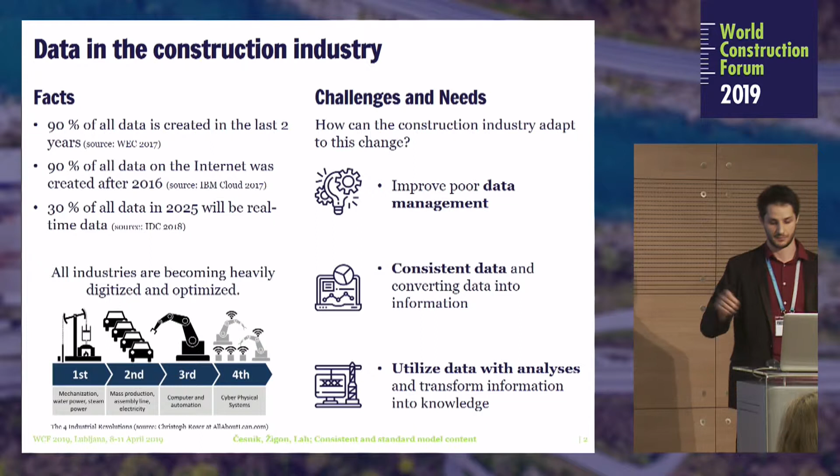So the entire presentation is going to be basically how to use data, how to use consistent data inside of BIM models. One of the solutions is to use BIM, because we know it's building information modeling, which is a process, and a lot of the previous speakers said that we can use BIM in a variety of areas. I agree with that, but we do need some requirements before we start using it.

We need to know how to use the software that we have actually on the market. We have to know how to manage that data. We have to know how to form new workflows around this new process and how the information flows through this process. Then we actually have to know exactly what's in our models. If we don't know that, we don't know anything.

That it's just building modeling, it's not building information modeling. We have to figure out what data has to go inside of the models, that it's meaningful, that it's intelligent. And then we have to figure out how we're going to process all that data, all that information inside of our models and transform it into knowledge. So that's the main workflow, to get from real life into actually knowledge through these BIM models and BIM processes.

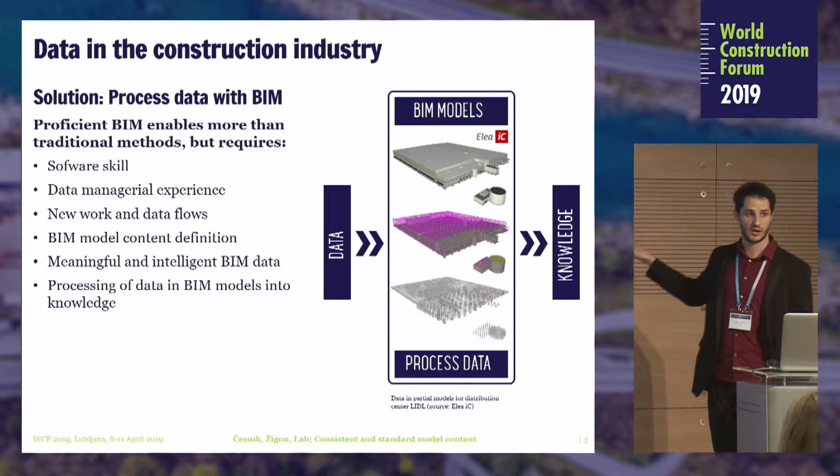So there are a couple of requirements. First of all, we haven't talked about this much in this conference, but we have to realize that employers, meaning investors and owners, play a huge role in how we can actually use BIM. They have to define their vision. They have to have the knowledge of BIM. They have to educate themselves if they want to actually have useful results from their projects that use BIM.

So they have to define their BIM requirements from their goals. They have to define how BIM is going to be used, and what the final results are. And they have to actually create a document called an EIR, meaning Employer Information Requirement, that defines exactly the use cases, the requirements, and what the employer wants to do with BIM.

The companies then need to, in reply, make their own document. This is the BIM execution plan that I'm going to talk about later. They have to accept and use BIM, improve workflows, proficiently implement BIM, which is a really hard task for all these use cases, and improve on different fields.

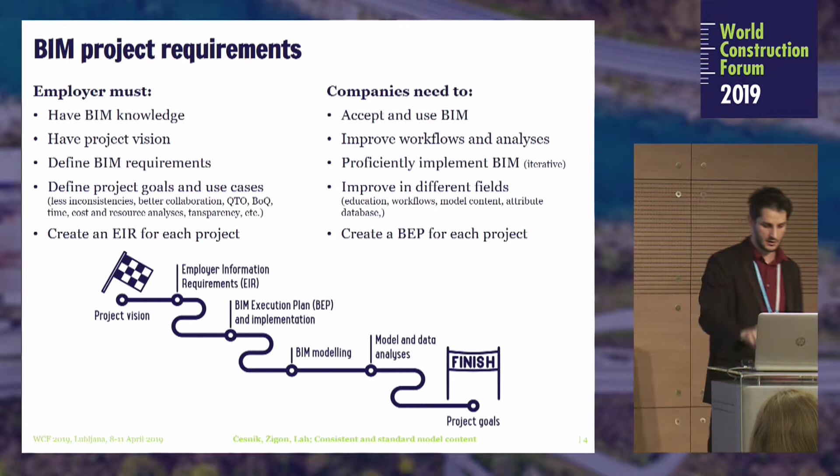So what actually consists of a standard BIM execution plan? Basically, you have to define all of the models that have to go into the workflow, who's going to do them, what's going to be included into them, and they have to define all the workflows that the project is going to follow.

This is really difficult - they have to classify everything in the models. If you don't have a classification, we can't use those models, we don't know what's in them. Then we have to define how developed those models are, what information goes into them, because if we don't have information, we just have 3D models. And then we have to define exactly for the element types or objects the required properties - the names, the values - and it has to be consistent over all the models.

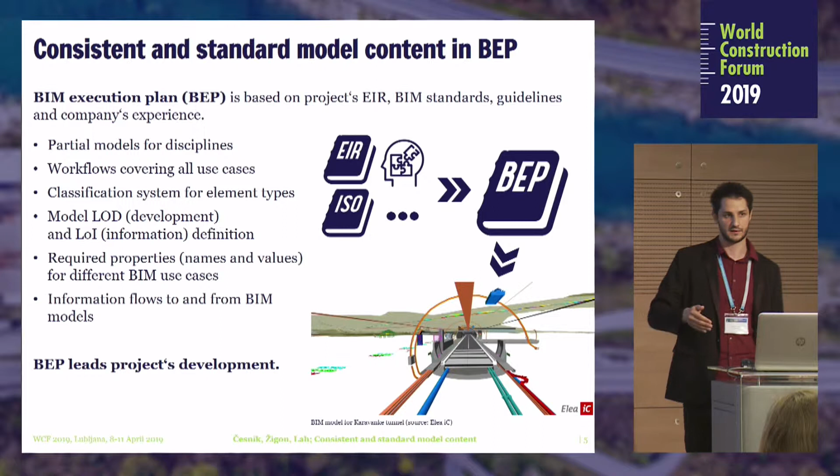And then we have to figure out how this information is going to flow, and that's all defined in the BIM execution plan or a similar document that leads the project.

So how we approached it is actually on one side simple, on the other complex. I'm going to simplify it here. The employer defines their requirements, and they have certain properties that they want to include, some information they want to include in the models. From there on, we develop our own information required for our workflows so that we can actually produce the results that they want, and we combine those two.

We basically feed all of the data, the entire framework, into the SQL database. From there, since we have a framework in the database, we can feed it into the authoring environment - that means either Revit, Civil 3D, Archicad, name it. You can basically just program the interface. And then we also feed it into analysis tools, and we connect those two - the authoring environment, so the BIM models, and the analysis tools that produce results.

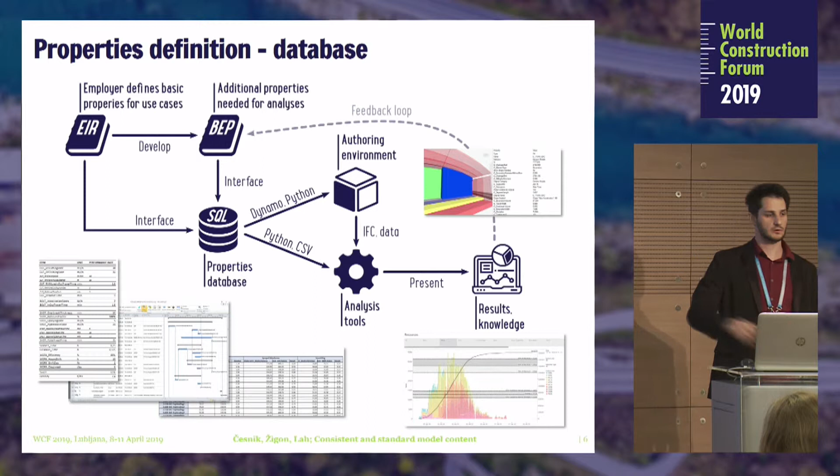And the results are basically knowledge. So the entire workflow flows from the information definition through the framework definition and then into the actual tools that produce results. Since it's an iterative process, every single project is fed back into our knowledge, so that the next project we create is going to include all the knowledge from the previous projects.

Okay, why am I talking about this? It's simple, right? Like concrete is concrete. Well, not quite. On one of our projects, this is the Karavanke Tunnel that we did a couple of years ago, and it's still ongoing, as Slovenes know. We had a couple of companies that created different models.

And we said, okay, let's have a quality of concrete included in all the concrete elements. And we figured, okay, everybody knows how to define the properties. Unfortunately, that's not true - everybody in their own companies has their own idea how they want to define the values. So is it slash? Is it backslash? Is it a dash? And that becomes a problem.

If you don't have consistent data, you can't really feed all this data into workflows, into rules, because the rules break - they don't figure out what's going on.

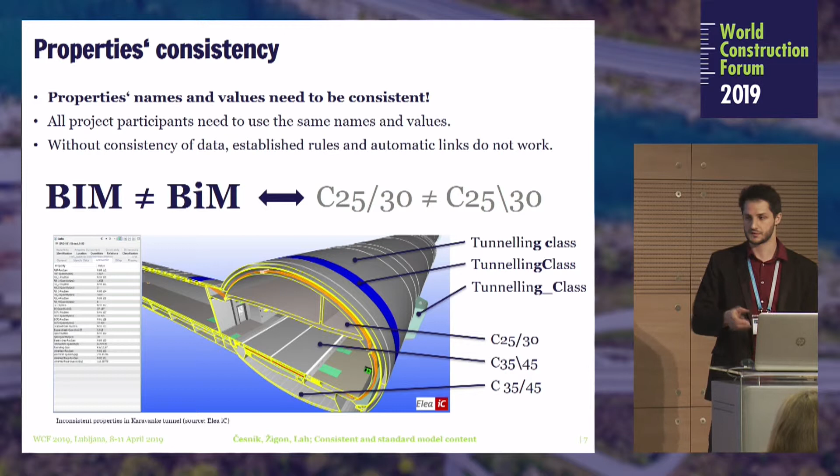So if I say that we have different data, if we make it consistent, then we can feed the design data, the monitoring data, and the construction data into our models, into our tools, and after some work done on that data, on that information, we have knowledge. And knowledge means we have histograms, time schedules, construction animations, visualizations.

And at the very end, we have quality control. This is one important thing for BIM that the previous methodology, the 2D methodology, does not cover - we have quality control over what we're doing, we know exactly how the information is going and what the results are.

And you're probably asking yourselves, okay, that sounds very nice and clean, but can you back it up?

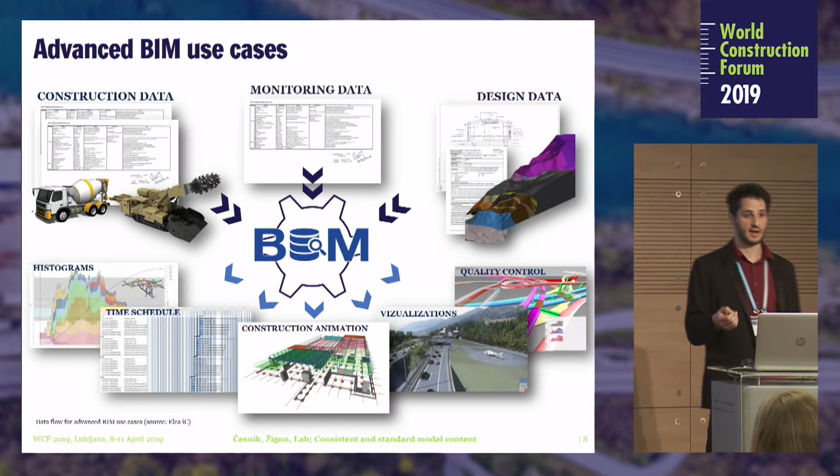Actually, we had a project last year. It was a tunnel interchange in Sydney, a very, very intense project with 2 construction sites. It included 12 road tunnels, 6 access tunnels, 6 ventilation tunnels, and a combined length of more than 19 kilometers. We called it a spaghetti. The problem was the submission time was really short, it was 3 months, and we had to optimize the design.

We got the design from other designers and had to figure out which one is the best. We had to figure out how to optimize the construction and excavation of those tunnels. And at the very end, we had to optimize the overall pricing and cost, because it had to be submitted as the actual cost, not just an approximation. This was our goal.

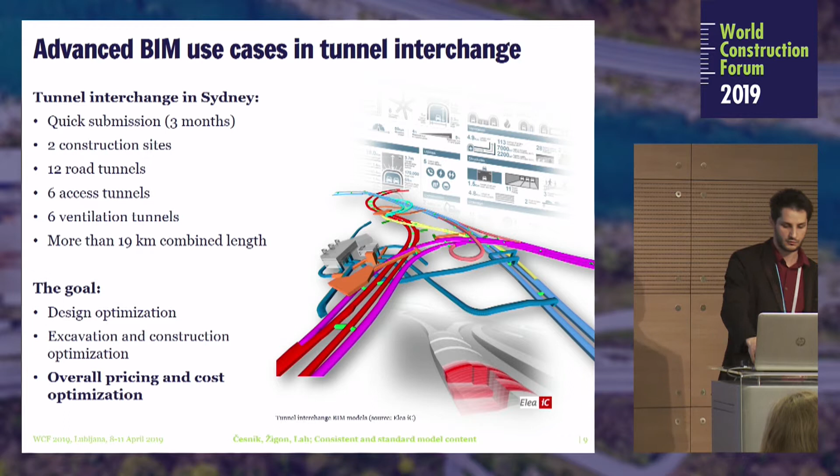What we did was quite complex. First we figured out how the Sydney people are doing those things, how they are modeling and constructing their tunnels, how things are done in Australia. We studied it and figured out some rules, wrote them down, and then created some parametric models, parametric families in Revit, and some scripts in Dynamo that feed the data and drive those families.

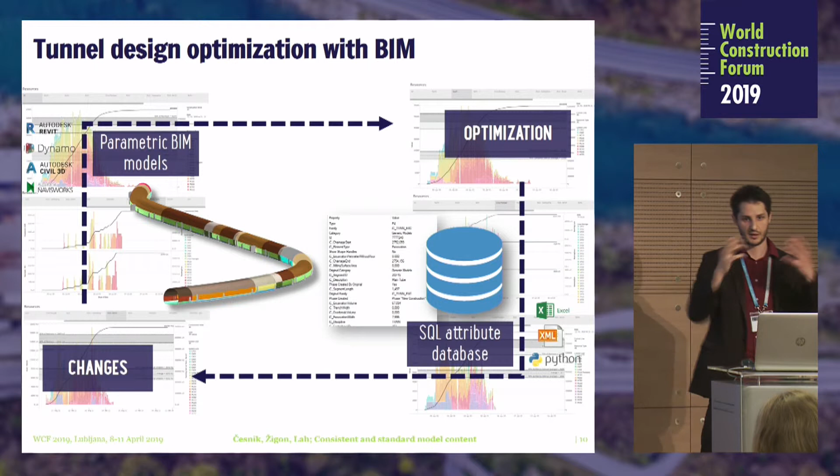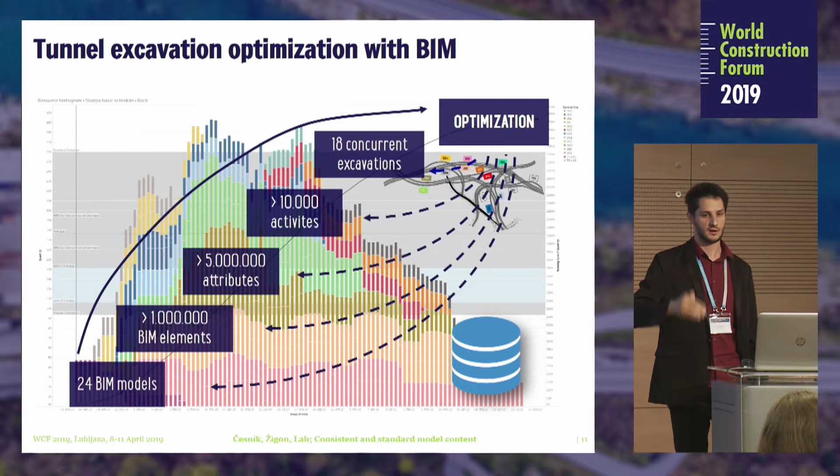At the very end we fed that into some of our tools. We got optimized results, fed it back to the SQL attribute database, and fed it back to the changes. The changes came 5 times in 3 months. You can imagine the entire project changed slightly in 3 months, 5 times. We had a huge amount of data, a huge amount of models, and at the very end we had 18 concurrent, meaning parallel, excavations going on at the same time. We had to optimize that.

And the result was something like this. Let me find it. Okay, perfect. So what you can see is an animation of excavation and then shotcrete on the main screen. Down below is the interesting part - you can see the data flow, you can see the knowledge, you can see how much excavation is coming out each month, each week, each day.

How much shotcrete is used with all the norms that they've given us, how much is being bounced off - that's also included. How many rock bolts are we using in the process of constructing this tunnel, how much of the rest of the tunnel equipment are we using, when is it being equipped, when is it being installed.

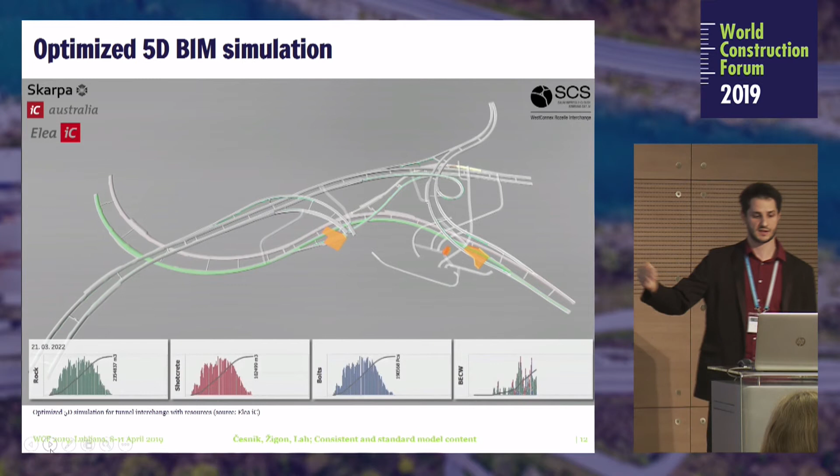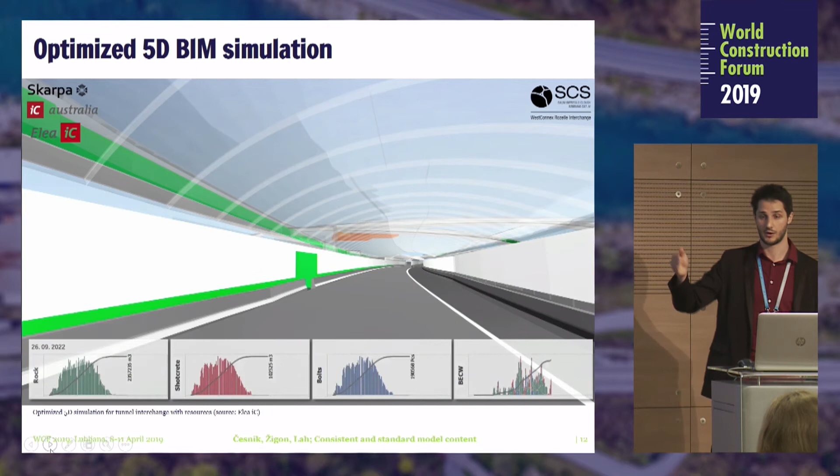This is basically the result of 3 months of very hard work of advanced use case implementation of BIM models. So at the very end, this is what the client wants - they want to know how much it's going to cost, how much time is needed to construct it, and how they can optimize it. Basically, this is the thing that we have to do.

So if we have consistent data, consistent information inside our models, we can have advanced BIM use cases that follow certain rules, certain procedures that we define beforehand. And then we can get better results with data analysis. We can have benefits both for engineers who provide this data and these results, and also for the investor. We can have a higher quality of projects because it's optimized.

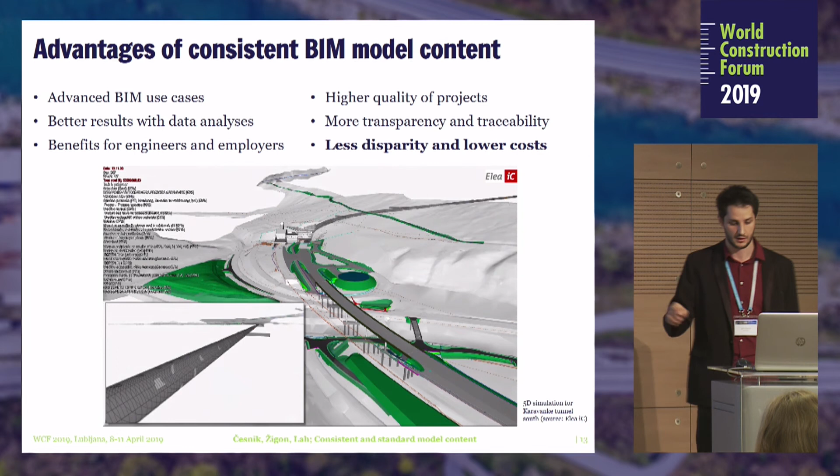At the very end, we can have more transparency and traceability, which is really a big drawback currently for the construction industry. And we have less disparity and lower costs for all our projects if we follow through with our designs and consistent data. So I would argue that we know a lot about buildings, we know a lot about modeling, but we have to figure out how to have consistent data, consistent information, and consistent model content if we want to use advanced use cases. Thank you.